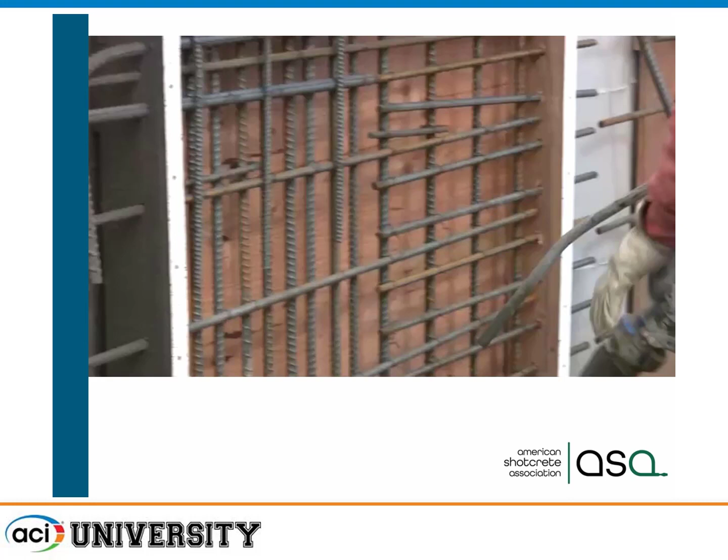I'm Charles Hanskat, Executive Director of American Shotcrete Association, but I already had the intro, so I'm going to go fast. I'm going to tell you about Shotcrete. I'm going to give you an hour and about 15 minutes, so it's going to be like that FedEx commercial where the guy speaks really fast to convey it.

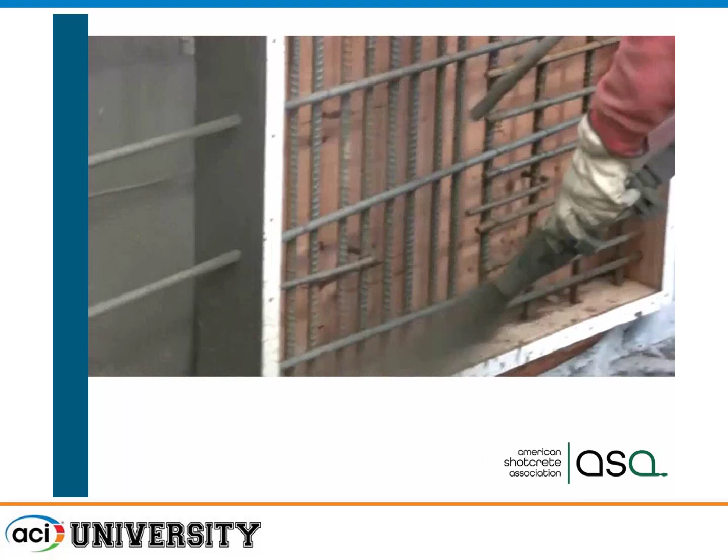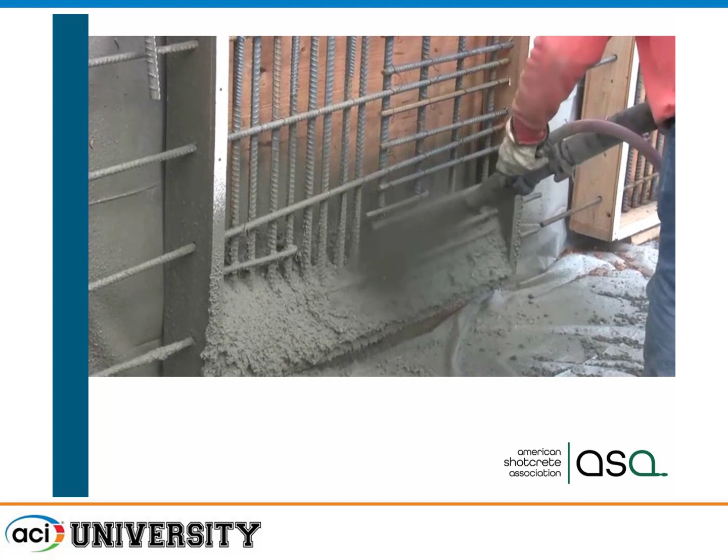I'm just showing this video of Shotcrete going in place. How many people have seen Shotcrete? Not everybody. But what we're doing is taking very low slump concrete, basically no slump concrete, and shooting it in place to build vertical or overhead surfaces. This is wet mix. You can see the concrete going in place, fully encasing the rebar. We're able to visually see all the concrete going in place, so we know when we get good encasement of the rebar that we're getting full consolidation of the concrete.

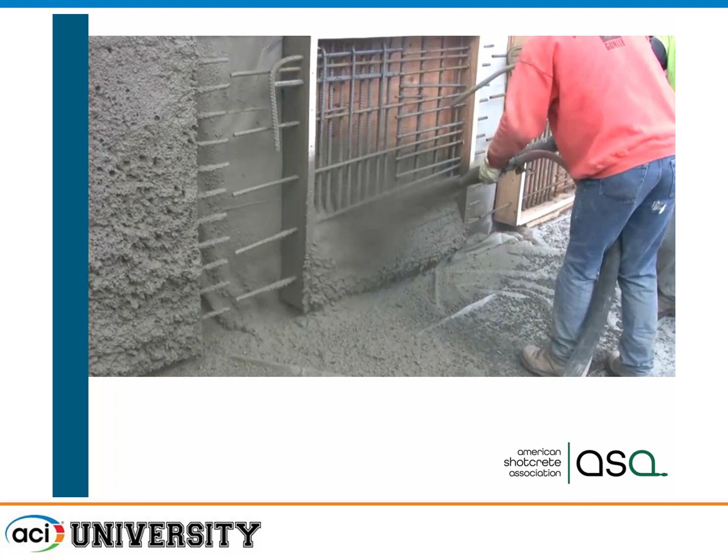So we'll just move ahead. Just wanted to show you what it looks like. Shotcrete is a method of placing concrete. I get calls all the time asking, what's the fire resistance of Shotcrete? It's the same as concrete, because it is concrete.

It's pneumatically taking concrete and placing it at high velocity. When we say high velocity, we're talking 60 to 80 miles per hour. So if you think about it, if you're driving down the freeway and you hit a concrete column at 60 or 80 miles an hour, that's a ton of impact, isn't it? That's what we do with every square foot of concrete placed by the Shotcrete method. That's how we get consolidation, and that's how we get it driven in place so it can hang not only vertically, but on overhead surfaces.

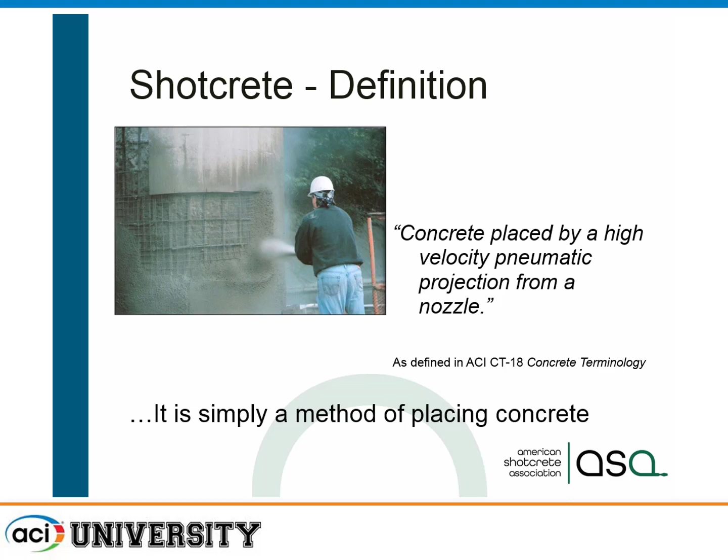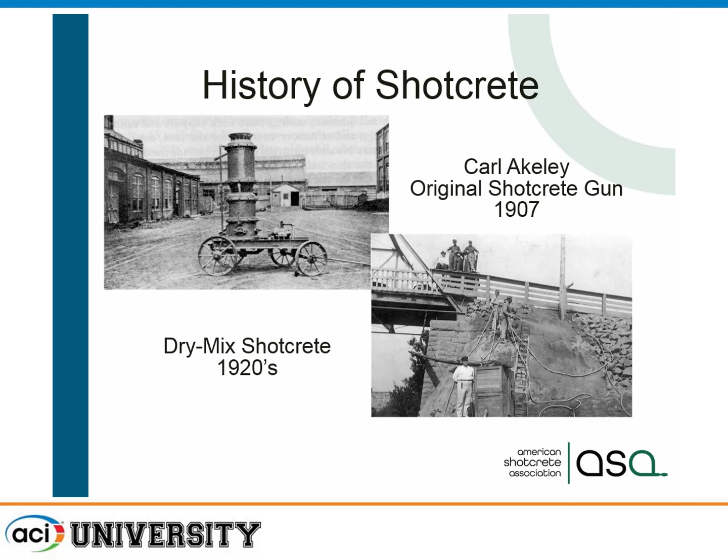Some people think we're a relatively new innovation. We're not. We actually predate the ready-mix delivery trucks — we started in 1907, and ready-mix didn't happen until 1914. Shotcrete was one of the original ways to produce high-quality concrete in place.

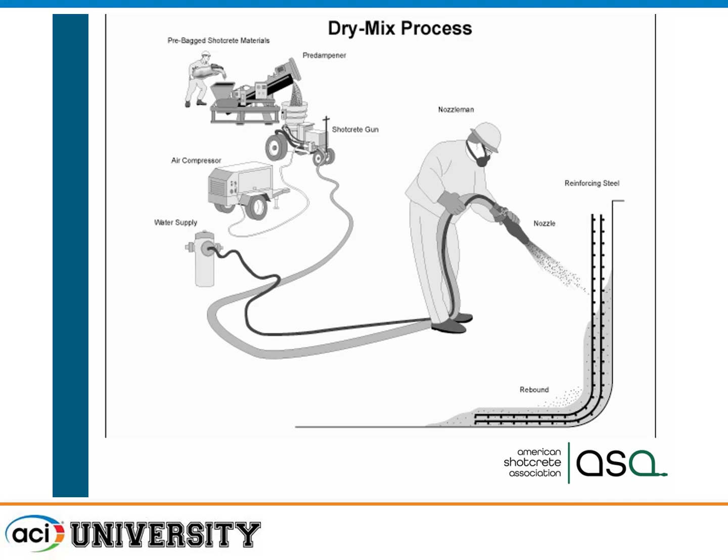We have two different processes: dry mix and wet mix. The original process was dry mix. That's where we basically take dry materials — pre-bagged materials with a pre-dampener — put it into a gun, use air to convey it pneumatically through the hose, and then use a high-pressure water source to hydrate that dry material right at the nozzle. So this is where we make the concrete.

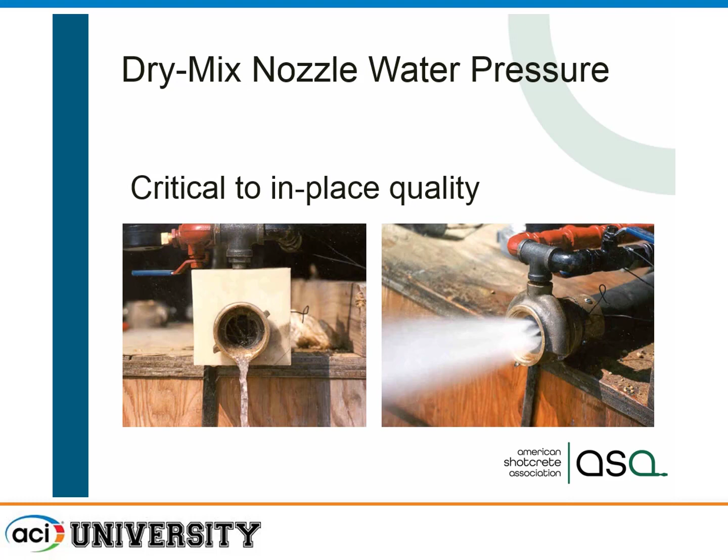In the nozzle, you can see what we're doing — we're atomizing that water, forcing the dry material through, and that is where we actually make the concrete. We're adding water to start the hydration process. We get mixing in the nozzle, mixing as it flows through the air, and then completing the mixing when it impacts on the surface. Here you can see a typical Shotcrete dry mix rig.

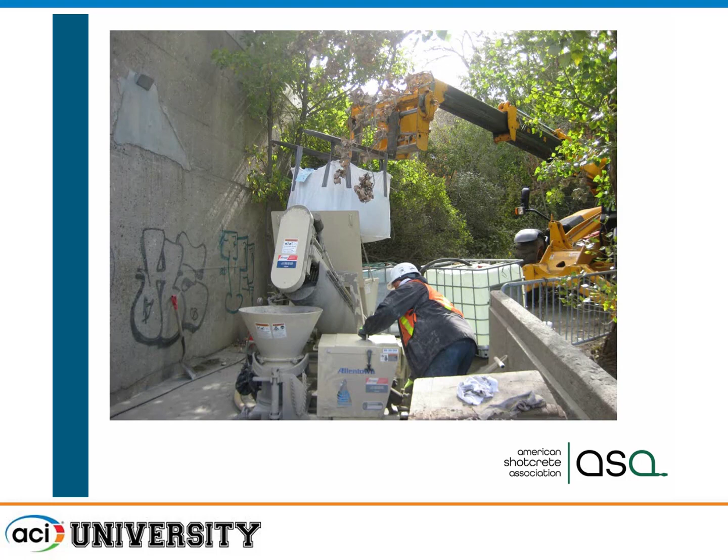The other process is wet mix. Wet mix was developed in the 50s and 60s when we started to get concrete pumps that were more reliable. These are basically hydraulic cylinder pumps, dual cylinder pumps, that pump the pre-mixed concrete from 1,000 psi up to almost 2,000 psi through a hose.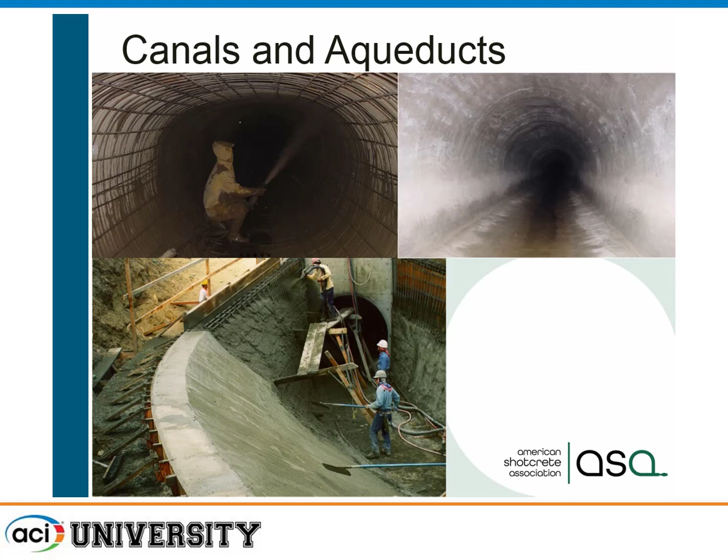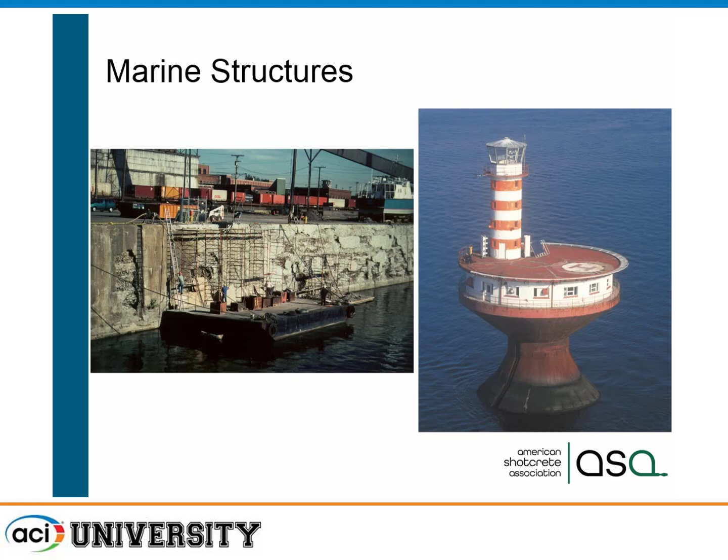Shotcrete is one of the most sophisticated users of concrete. We use superplasticizers, high-range water-reducing admixtures, so we can maintain low water-cement ratios and still get it pumpable and workable through the small hoses that we use.

We use alkali-free accelerators. Microsilica is really popular. Microsilica is great for reducing permeability and chloride ion penetration in your repair materials. We use steel and synthetic fibers.

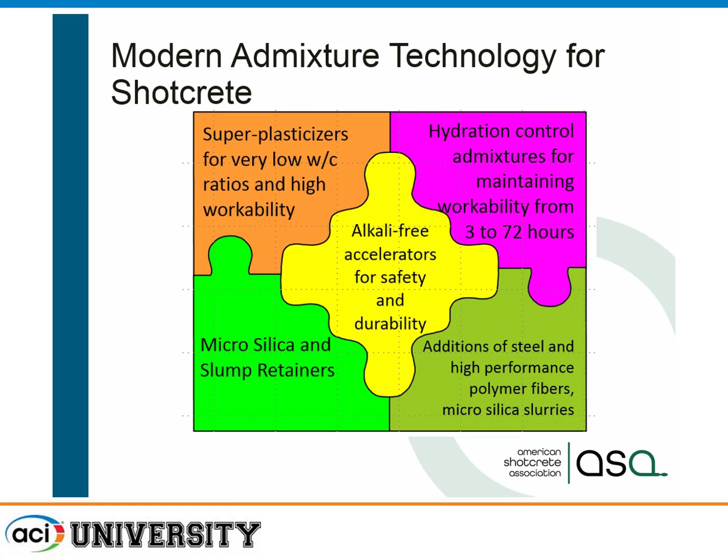A lot of our contractors are using hydration control. This is where you can actually put the concrete to sleep for up to 3 days. We don't need that much, but it gives us much longer than the 90-minute window that's typical for concrete from when it gets water added at the site to put in place.

We can also add things like corrosion inhibitors. We can use a variety of supplemental cementitious materials. Silica fume is obviously one of our popular ones.

Anybody here use silica fume in concrete? You found it was very thirsty, right? Sucked up a lot of water. You really have to get water on it quick.

But it also makes it sticky, so it'll stick better when we're shooting overhead. And it also allows us to shoot thicker layers. So if you have a repair that's 3 or 4 or 5 inches thick, we can do it in one layer if we're using silica fume because it holds together.

We also use fly ash. Fly ash increases our pumpability. A lot of times if you have a mix that's not working really well with just Portland cement, you can add fly ash and it'll help slick the line a little bit more. And we've used mixtures, I've even heard up to 70% slag. So we are very sustainable in using recycled materials.

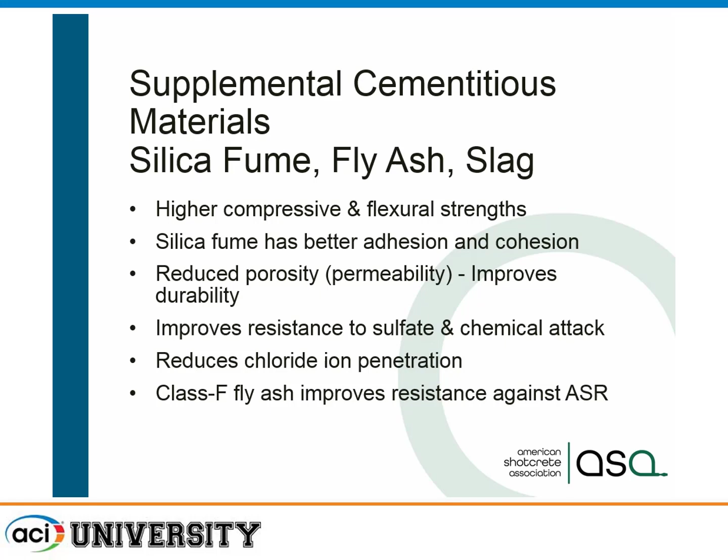And most of these are good for shotcrete, good for concrete, reducing permeability. Class F fly ash helps mitigate problems with ASR.

A lot of people say, well, what's up with the air content and air entrainment in shotcrete? We use air entrainment in wet mix. You get it in the pre-mixed concrete truck. In dry mix, we actually have admixtures in the pre-bagged materials that will allow us to form these little air bubbles that are essential to having freeze-thaw durability.

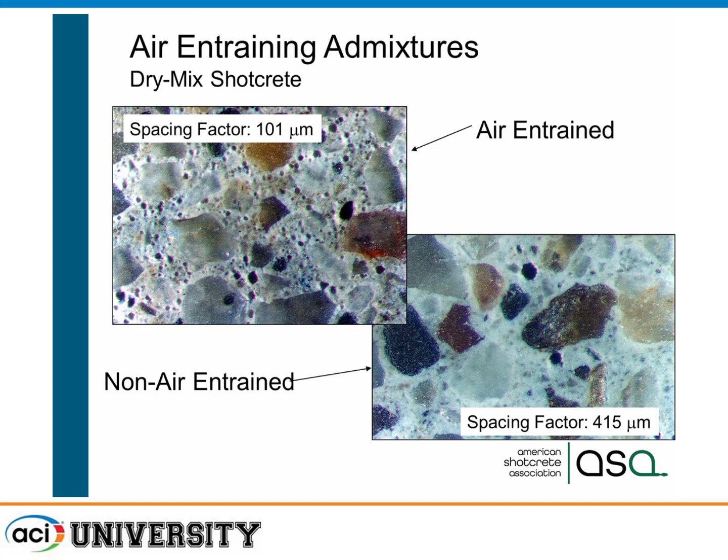One thing that we do get, though, remember the impact? We're talking 60, 80 miles an hour. We knock air out. So if you measured 7% at the truck as it came out, it may be 4% in place, because what we do, we knock out the bigger entrapped air bubbles but keep the little bubbles. Those have a lot of surface tension, but the big ones get knocked out. So we keep very good freeze-thaw durability, even though you do lose a little bit of air content.

Rapid set accelerators are really heavily used underground. That's not a repair application, obviously, but it's where they need to get in and stabilize an excavation so that they can move on to the next.

But it's also used quite a bit, like that lighthouse instance where they needed to get it in place, set, and strong early. It may happen on a bridge deck, underside of a bridge deck, where you can only have part of it open at night, or you've got to put traffic on it very quickly afterward. You can use a rapid set accelerator to get it to set very quickly and also gain strength, getting 1,000 psi, 2,000 psi in a matter of hours.

Another thing we can do with shotcrete is use alternative cements. I'm not showing it here, but we can use very rapid set cements that get us high early strength. That's predominantly used in a dry mix application, because in dry mix we're not wetting it until it's right at the nozzle, which allows us to use a lot of these alternative cements to get that concrete in place.

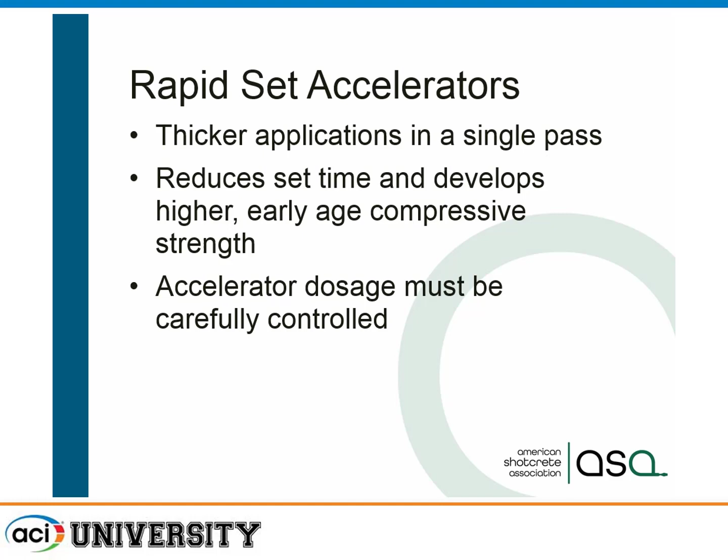One thing, if your job is using accelerator, be very careful. Too much accelerator is a bad thing. Too much accelerator will make your concrete weaker long term. Some superintendents say more is better, and maybe it sets a little faster, but it really does significantly affect the strength. So you need to be sure it's very closely dosed relative to the volume of concrete going in place.

Fibers - we use microsynthetic fibers a lot for control of early age plastic shrinkage cracks, which is a problem in a lot of our repairs, where the surface is exposed to air and wind, maybe in a dry climate like here in Las Vegas. The microsynthetic fibers help control the early age plastic shrinkage cracks.

When we get into more structural applications, we use steel fibers, and also macrosynthetic fibers, which are longer, bigger diameter fibers. Those are actually about as effective as steel fibers in providing resistance against more of the long-term cracking.

We've also been using natural hemp fibers that actually hold some water, providing some internal curing, which is really good for a repair job. It's almost like internal curing of your repair as well as external, so you get less shrinkage cracks overall.

So what do we do for surface prep? You can shoot, but if you're going to shoot good shotcrete on bad concrete, where's it going to fail? It's going to be in the bad concrete.

One of the biggest problems in a lot of jobs is the engineers come in and evaluate and say, yeah, we think we'll have to take out 2 inches, and you chip in and it's 3 inches, 4 inches, 8 inches. At some point you have to have a structural engineer evaluate when you've taken too much. But you've got to get back to good sound concrete - chipping, scarifying, hydrodemolition, which I think is the next talk - has been real popular in shotcrete applications.

If less than 50% of the bar is exposed, if you have just half the bar showing, it's okay to go ahead and encase that with shotcrete. If there's more than 50% exposed, we like you to excavate back behind the bar so that we can get shotcrete back and actually tie that in.

We also want to bring the surface to saturated surface dry. That means it's wetted - we fill the pores of the concrete surface with water, and that allows us, when we shoot against it, to drive that paste into the surface. It's not really diluted, which allows more of the hydration right at the surface. If we have running water, it's going to be too diluted, and we're going to lose some of the bond.

If you shoot against bone dry concrete, what's it going to do? It's going to suck the water right out of the paste, right at that interface, and that also can reduce bond.

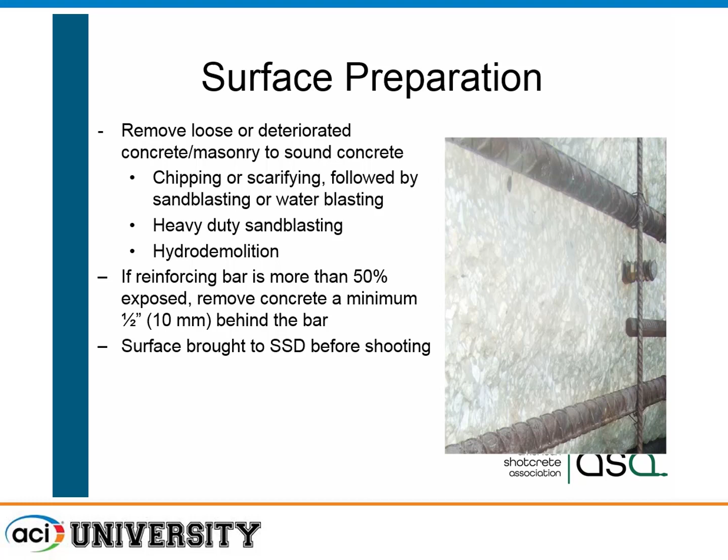We don't like feathered edges. We like to have a saw cut, 3/4 of an inch, get back behind the steel. Why would we not like a feather edge? How about anybody here do a feather edge in your repair?

That's the first place to fail. It goes through a summer-winter cycle, and a little bit falls off, then a little bit more, and a little bit more. If you have a nice shoulder like this and shotcrete against it, it gives it enough meat that it can hang in there and act as a structural repair.

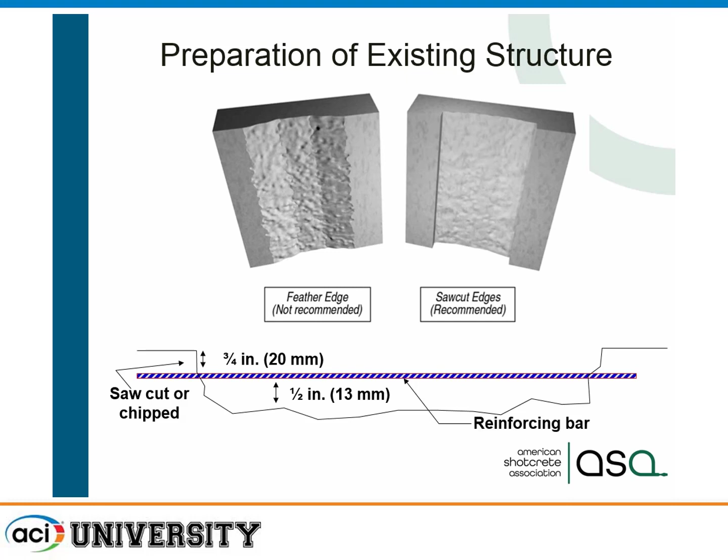Many of these are saw cut, but we don't want to shoot against the saw cut. We like to have that surface sandblasted or roughened at least so that we can get good bond of our shotcrete during placement.

We never recommend bonding agents. I get a lot of inspectors or contractors that call and say the inspector told me I had to use a bonding agent. Well, a bonding agent's fine when you're casting concrete, but remember, we have a very active process—we're impacting at 60 to 80 miles per hour. If we had a bonding agent, number one, we would probably strip it off because we're in fact sandblasting it in place. And number two, if the bonding agent is outside its open window, it can actually act as a bond breaker.

Because we're driving that fresh and relatively high cement paste content shotcrete into that surface, we get excellent bond. You can typically see at least 145 psi tensile bond strength. Looking at the literature, the bond shear strength that allows a section to act monolithically needs about 200 psi, but you multiply tensile strength by 2 or 3 to get your equivalent shear strength. So we are basically creating monolithic concrete when we shotcrete in place, or if we have individual layers of shotcrete to build out a thicker section.

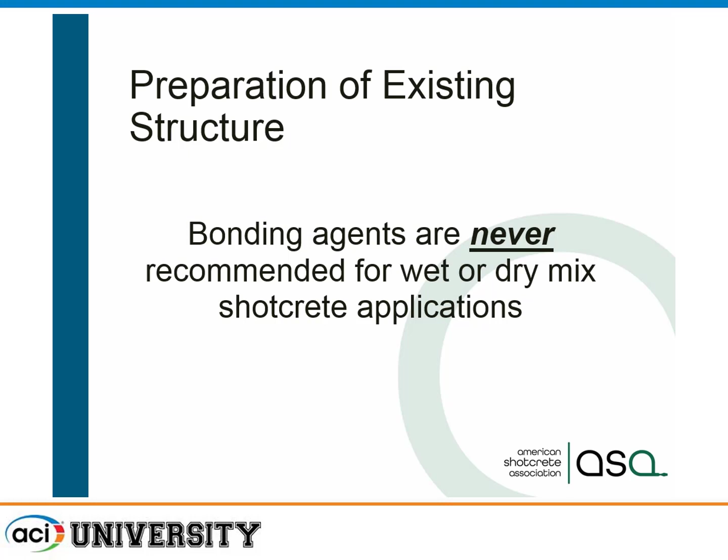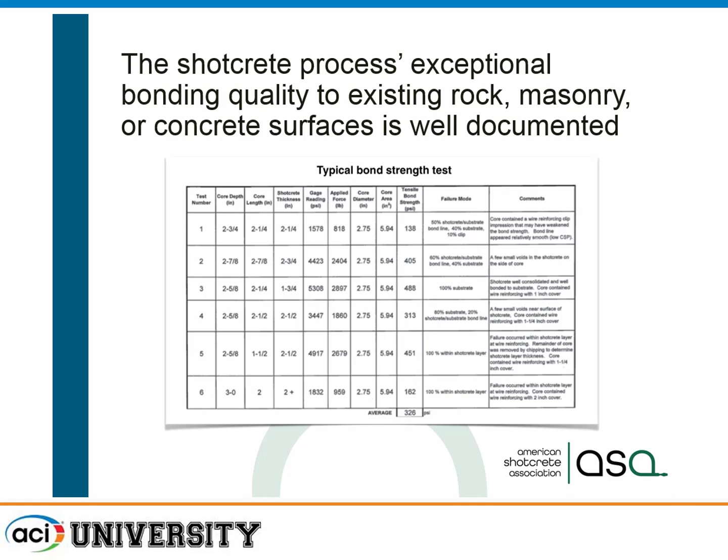Why are we getting such good bond? High energy placement. I guess I got ahead a little bit in terms of the slide, but 138 psi was the lowest here, and you can see tensile bond strengths of 400, 450 psi. Here's a lower one, 162. Generally it's very easy to get roughly 150 psi. If it's less than that, there's some problem with the surface prep or with the placement or the material in some way.

Here's an existing substrate, and here's where we shot against it. It's very difficult, except for color, to see that we have any kind of interface there.

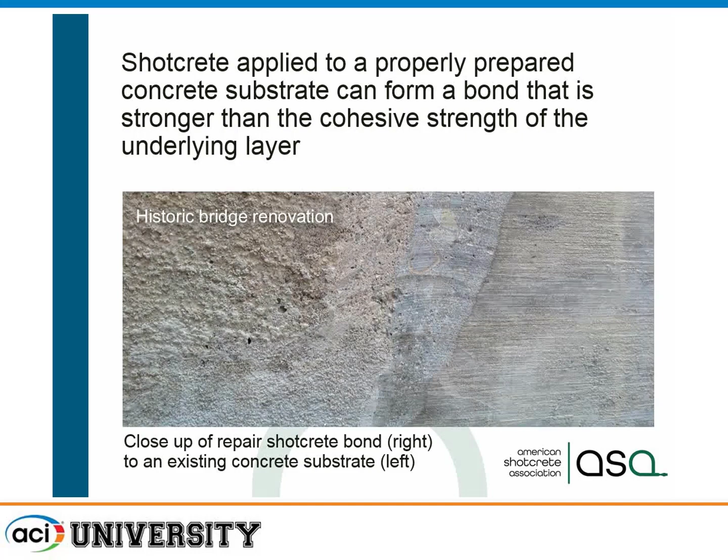How do we control thickness? I mean, we're shooting it and it's coming out of that nozzle. We actually use what we call alignment wires, ground wires, shooting wires. Here, this is horizontal, so they can make a radius here at the bottom. But the engineer or inspector can come up and say, okay, I got 2 inches of cover here, so that's what I need, because you shoot to it, just a little bit past it, you finish it right to the wire, and you know you have that 2 inches of cover. It also helps us define some of the more unusual curves and radiuses.

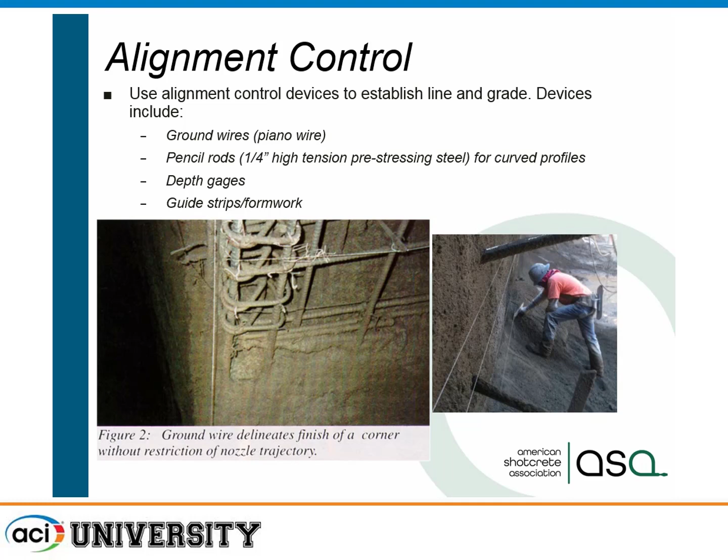What kind of finishes can we do? Anywhere from a gun finish to the most expensive carved finish like this.

A lot of people think this is shotcrete—this is our old gun finish. If you go in a wine cave or underground, yeah, that's what you'll see. But our guys have gotten really creative. We can actually float, we can steel trowel finish, we've shot it as fresh concrete. We can do anything to that surface. We could stamp it to make it look like brick, or carve it to look like rock.

We don't like the steel trowel finish because how do you get the gloss from a steel trowel finish? You pull water up to the surface, right? So a higher water cement ratio means less strength, so it will not perform as well durability-wise. The other thing is that's a glossy surface—if it cracks, a little bit of cracking is going to show more. So we can do it, we just don't like it. This is probably the most common finish, a float finish or a sponge finish.

In repair applications, though, if it's a highway pier, we can match whatever the texture was before. Now, one of the things we can't match is color, because 50 years ago concrete wasn't the same materials we're using now—we're using fly ash, silica fume, slag, and those actually affect the color. So we can match the texture, but not the color. So if an owner is looking for a consistent color, maybe use a cementitious coating that allows you to still have that concrete color, but provide it consistently.

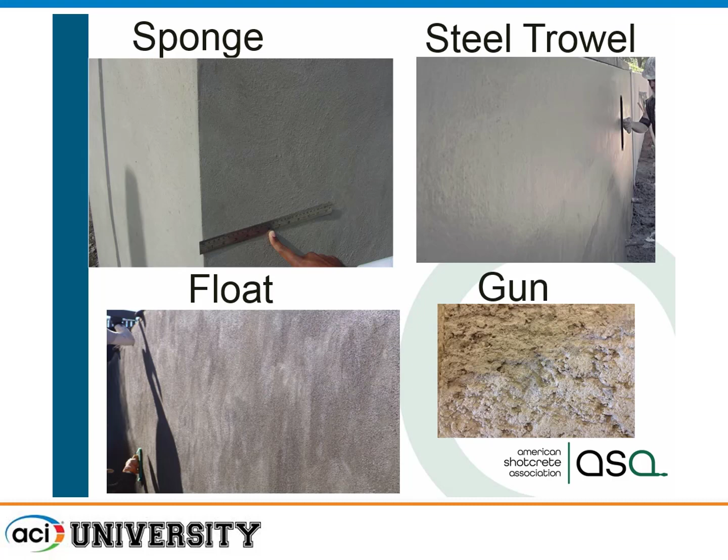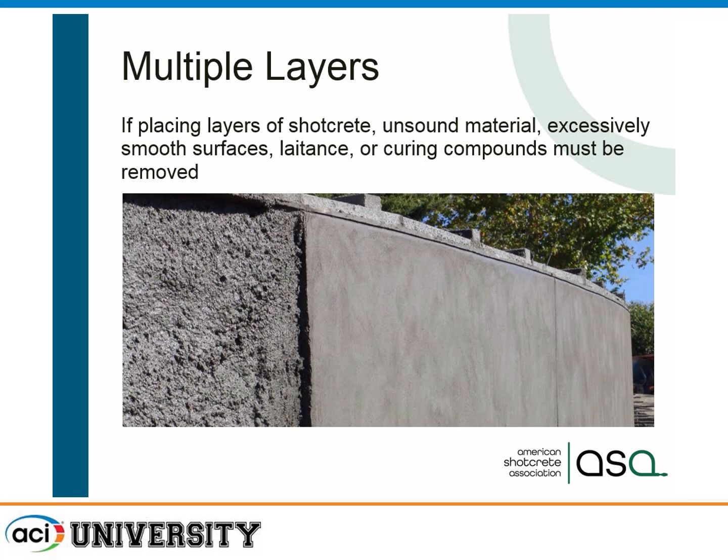And we can do multiple layers. If you have a deep repair, we can shoot it close, and then we take care in this final layer. It all acts monolithically and provides that nice float finish, steel trowel, or carved rock finish. Here you can see they're shooting a curved section, no formwork, easy to come in and shoot. We do, as we get off the ground, like to use man lifts.

This is what I'm talking about in terms of color. This is the old concrete versus the new. If it's a DOT bridge, maybe they don't care—it's underneath the bridge. If it's out there and some architect's worried about how that repair looks on their building, you can come in with a coating. Once again, it's just concrete, so anything that works on concrete as a coating can work on a shotcrete placement.

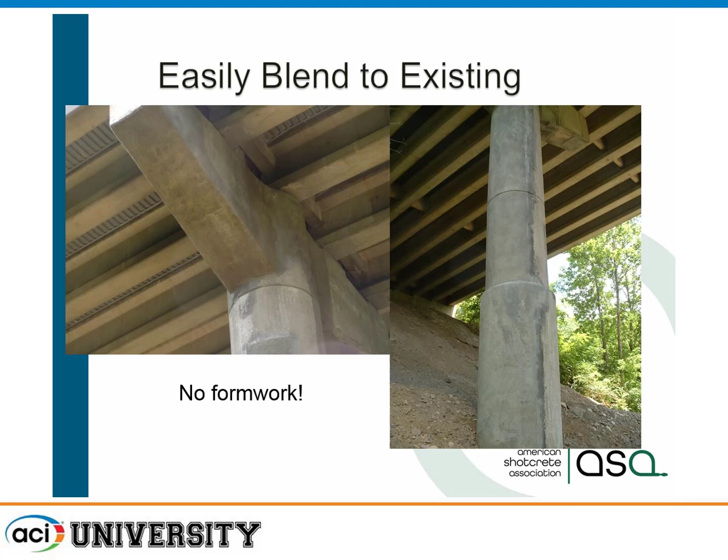When you have shotcrete, there's a lot of things different than casting concrete, right? We have the nozzleman. In dry mix, the nozzleman is controlling your water cement ratio. In wet mix, he's controlling the placement, making sure he gets full encasement. So we strongly encourage that you have ACI nozzleman certification for your nozzleman—both in the process, whether it's dry or wet mix, and the orientation: vertical, overhead. If you're doing overhead repair of a bridge deck, you should require, if it's wet mix, a wet mix nozzleman certified in overhead placement.

These are great references. I know the RAP document is really just a basic primer, so if you're going to get into shotcrete, look at the Guide to Shotcrete. This is the best resource we have. It's a primer written by ACI Committee 506, probably one of the committees with the most contractors, so we've written it to be very readable—not like going to a 224 cracking document and trying to figure out what they're saying.

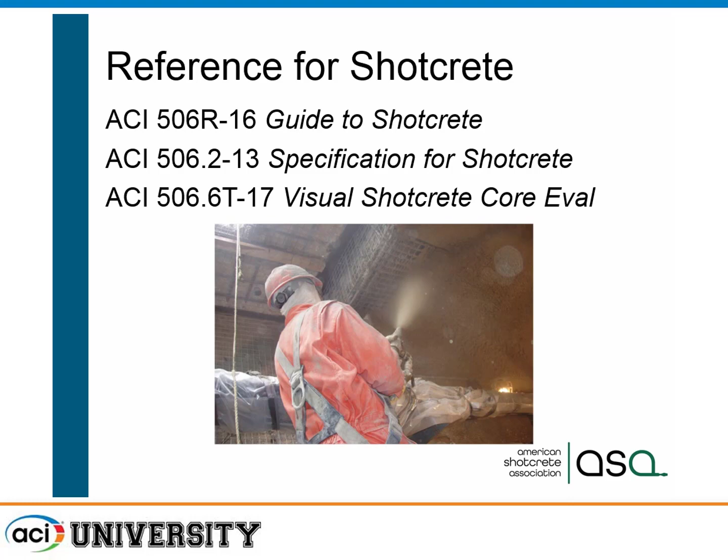We talk about crews. The other document is Specification for Shotcrete, and then we have Visual Shotcrete Core Evaluation. These are the resources—shotcrete.org, that's where I'm from, we're the American Shotcrete Association. And then concrete.org, that's the certification process administered by ACI, and also all our 506 documents.

So that's all I have. I might have taken a few minutes more, but you had a few minutes more. So, any questions?

When you're doing multiple lifts, are you ideally letting it set initially before you put your next lift on, or is it right away? Well, let's define lifts. If I'm doing a 2-foot thick wall, a new wall, we're going to bench it from the bottom to the top. We may do a bench about the height for the nozzleman to be working—5 feet. We're going to let that set, because when we add the next lift on top, it has to be able to carry the weight of that new fresh concrete. If I'm doing multiple layers of shotcrete through a section, they still have to be pretty well set up.

You're going to want your final set. If it's going to be a longer time than just that same day, we actually say it should be roughened—it could be a broom finish. Then the next day when you come in, it'll be wet, it'll be cleaned. You could use a pressure washer, clean it, and then get a saturated surface dry. Once again, we like that saturated surface dry to really work with the paste.

I pointed out that you can see visually everything going in place. If you know shotcrete, you can see that you're getting proper encasement and that it is being consolidated properly. We do have compression tests—we don't do cylinders. What we do for QC, for compressive strength, is shoot into a panel and core it. There are ASTMs for that.